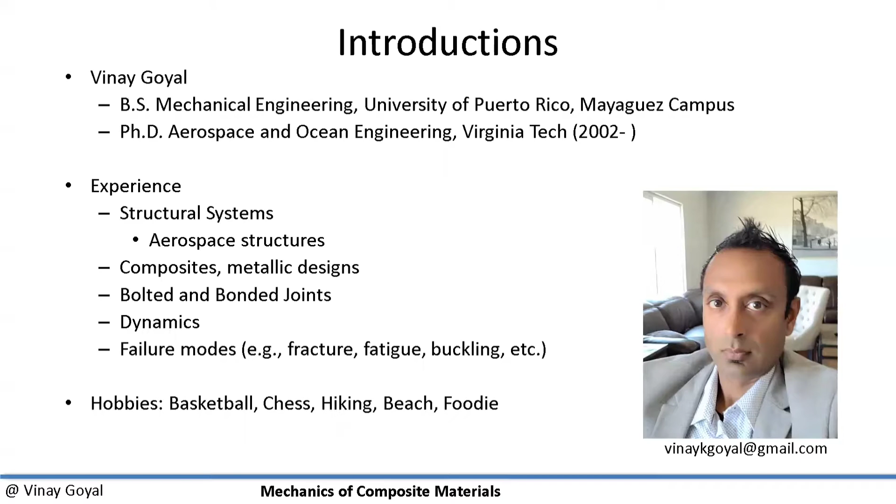In addition to that, I'm involved with several NASA activities, and I also work with the government on a lot of different projects. I have a vast familiarity with the use of composites in several arenas, including aircraft, launch vehicles, commercial applications, spacecraft, and other systems, even things such as a golf club, as an example.

What is the motivation? Advanced composite materials are extensively used in high performance applications. They can be used in automotive to decrease weight, in aircraft and ship systems, and including launch vehicles and spacecraft. The reason we use composite structures is because by decreasing the weight of the systems, we're then able to increase the efficiency and performance of these systems. So an aircraft can use less fuel if it uses composite materials, as an example.

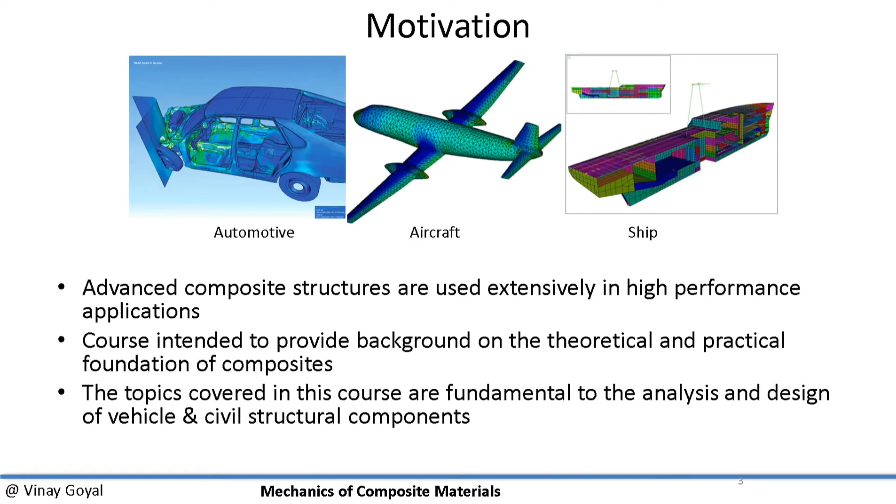This course is intended to provide a background on the theoretical and practical foundation of composites. The topics in this course are fundamental to the analysis, manufacturing, and design of vehicle and civil structural components.

What are the objectives of this course? In this semester, what I plan for us to do is to really gain an understanding of the fundamental concepts in the analysis and design of laminated composite materials. To do that, we want to understand the various methods for the manufacturing processes of composites. We're also going to cover experimental methods for the characterization of composite materials.

I think that's a very important arena that's usually not looked at carefully, but it impacts significantly the systems that we work on, because the experimental methods you use can drive the strength used in the analysis of a lot of the systems.

We'll cover design and analysis of composite materials, and how to tailor the composites to get the best performance. We'll then cover the failure criteria that exist to predict the failure of composite materials, and then talk about the design considerations that you need to keep in mind as you apply them in real systems.

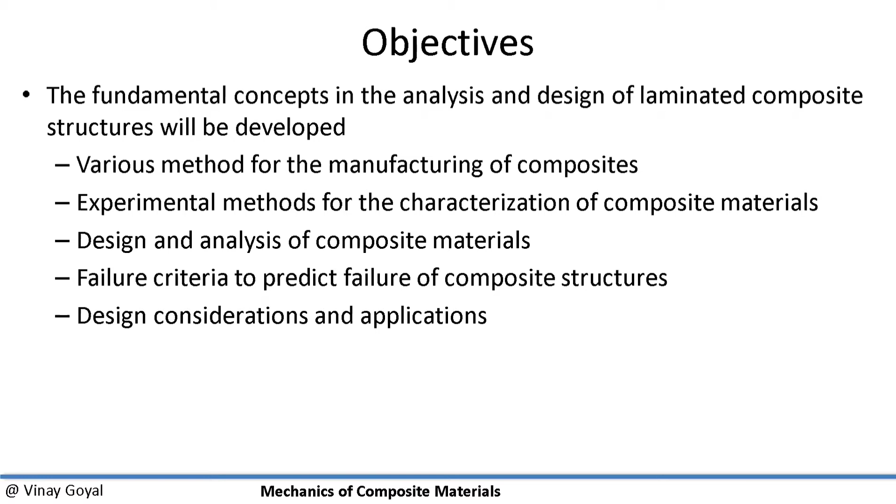I hope all these ideas come to fruition through this course outline as we go through it. What I'd like you to do is not only study the materials I'll be teaching, but also focus on materials outside of what I'll be teaching, because I think you'll learn a lot. One thing I want you to do is enroll in Composites magazines, and you'll see that in some of the work you'll be performing. The idea is to get exposed to a lot of different ideas and get informed about how composites have evolved, how these materials have evolved, and what are some of the new applications they're being used in.

So in today's lecture, we're covering the motivation. We'll be moving to material science, manufacturing, and micromechanics, and applications as well. Then from there, I'll give a very top level view of solid mechanics.

The idea of solid mechanics is covered much more extensively in a different course, so here what I'll do is provide a very top level view of that. And then we'll cover the characterization of material properties, which, like I said before, is extremely important for us to look at carefully — what kinds of testing I need to really get the material properties for the system of interest.

Then I'll be talking about approaches to determine equivalent material properties, and when we get there, you'll better understand what that means. But then later I'll move to the analysis of laminated composites, and that's really the mechanics of laminated composites. You'll be learning some of that material as well.

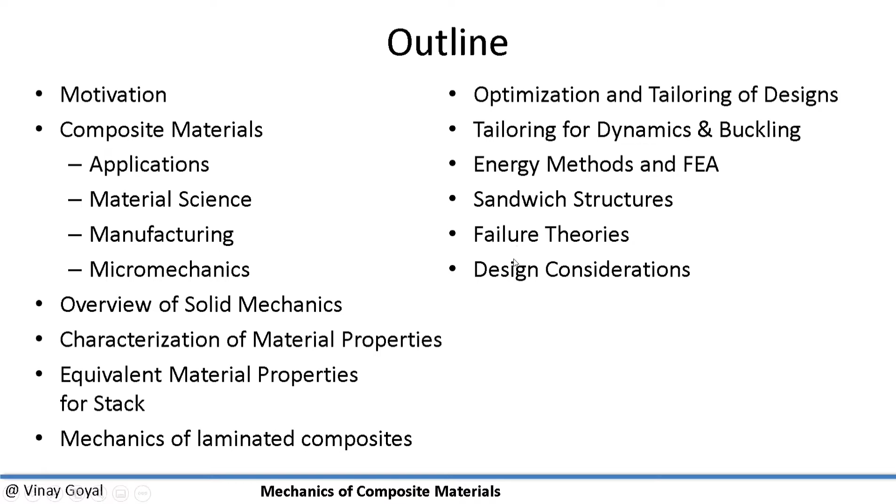Composite applications are used in an extensive number of applications, including a turbine blade that you see here, and they typically fail in fatigue in these applications.

Composites are also used extensively in aircraft design. The 787 body, made using a lot of composites, over 50%, in the main fuselage body, the metallic gray, with a combination of aluminum, which is the red, 20%, titanium, which is orange, to some fairly low percentage, and then steel at 10%, which is blue, and then other materials.

Composites have really increased the performance of a lot of systems, and this is very, very good, and that's why it's being used. But they also have a significant amount of downsides. They have upsides and downsides.

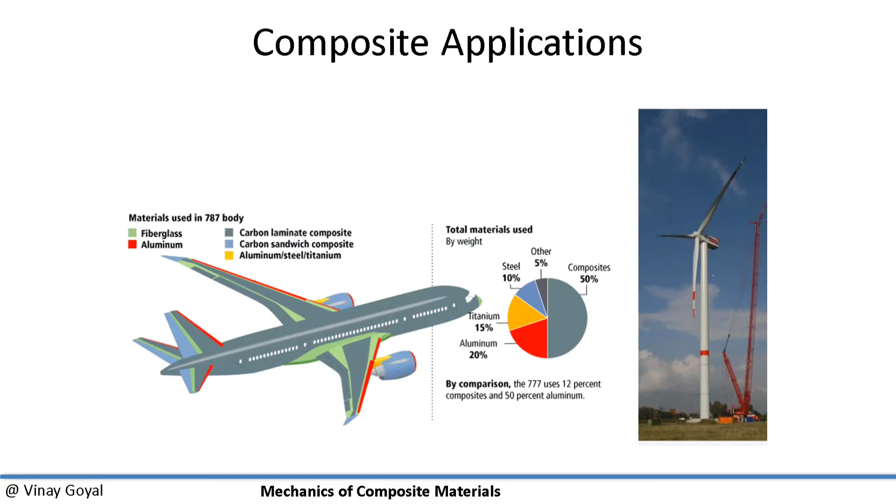By comparison, if I were to compare this aircraft to a 777, that used 12% composites and 50% aluminum. So the 787 is a much more advanced system, it's more robust, but also provides higher performance compared to heritage systems. So, what are composite materials?

Composite material is really the combination of two or more materials. The types of materials we'll be discussing here are a matrix. You're going to have a matrix material with a fiber impregnated within the matrix.

The matrix material tends to be such that it's malleable, so before you cure it, it's malleable, and that matrix material is soft at the beginning. It holds the fiber and binds the fiber together. That's the whole point of the matrix, is to keep everything together.

I'll look at it similar to, say, a shirt. You can see the fibers running through your shirt in perpendicular directions. But think of that shirt now bathed in a resin glue of some sort. That resin material, when it hardens, is now going to have the fibers impregnated in it, running perpendicular to each other. So when that glue hardens, you're going to have a composite material that's quite strong.

Because the material now has those fibers going through it. If you've heard of wood structures, the wood structure is basically a composite material, because you have these fibers going through the trunk of that tree, and that fiber is really providing the strength.

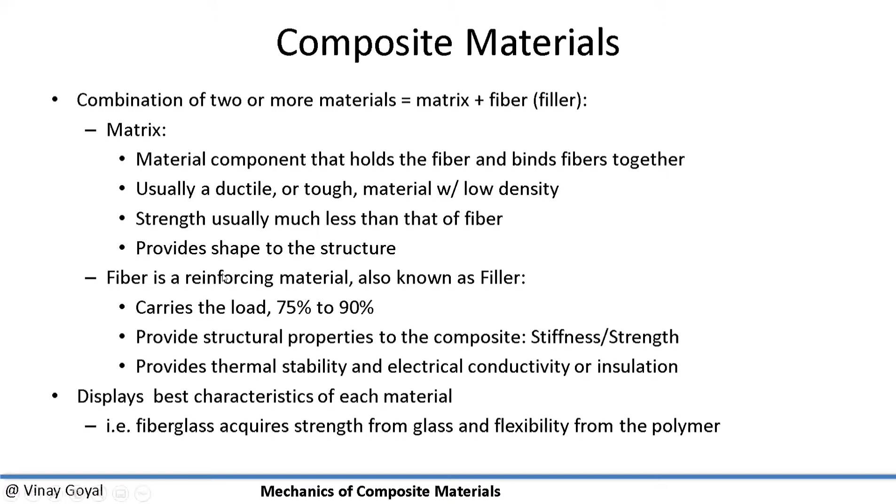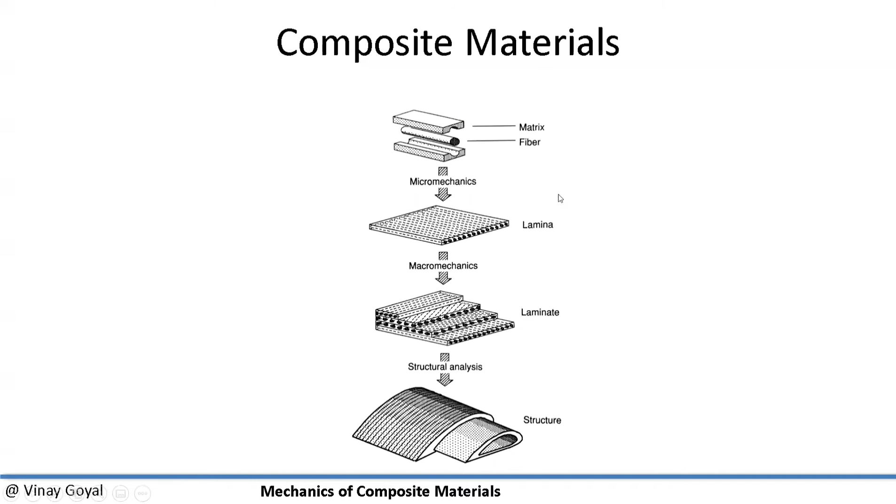Okay, so there are a lot of different types of composites. You can have a particulate composite. Concrete to me is a particulate composite, because if you put stones, rocks, and sand with a binding material, that's basically a particulate composite. But we're not going to cover this kind of composite.

You could have a situation where you have fibers running randomly within a block. We call that fiber reinforced composite. We're also not talking about this one. You could have flake composite where the fibers are chopped and maybe they have a very non-uniform fiber distribution across the composite. We're not covering that either.

Now, you can apply the ideas of this class to these types of composites very easily. But the kinds of composites we'll be covering in this course are laminated composites, which are going to look orderly. The fibers are continuous, and they're laminated. So I can stack the composites like this, and this is what is used for 99% of the applications. You could have these other ones, but the ideas I'm teaching in this course can still apply to these other ones. It's just that I'm going to specialize what we teach to this class of composites.

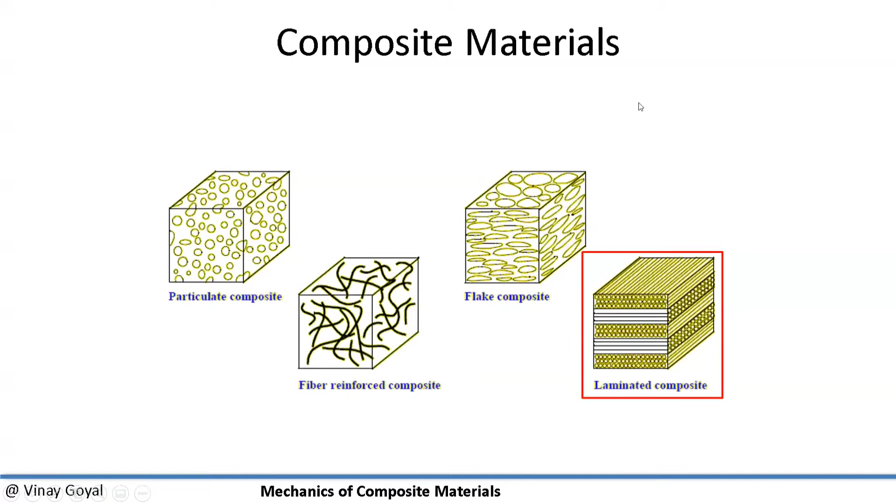Okay, so that's what we're talking about here. We're not saying we're not going to cover the other kinds of composites, but that we're emphasizing the idea of composite materials in light of laminated composites. That's what we're talking about. I'm going to go ahead and share a video of composites.

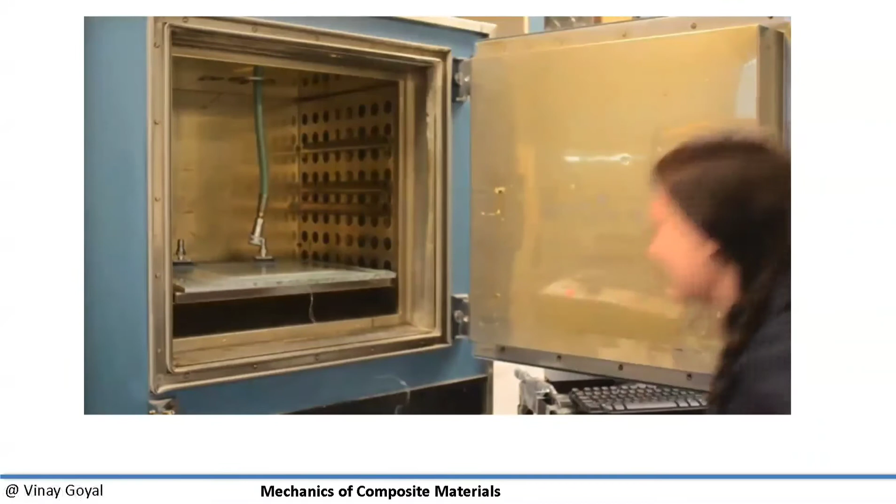So as you saw, we were looking at the manufacturing of a composite, and the manufacturing of a composite can be such that a lot of different defects could occur, including porosity, defects between plies, indentations from the pressure sensor, and many other things we'll cover later. The reason I was showing those videos is so you can get familiar with how the composite looks like. You're not able to touch it, but you can see the texture from afar, and you can see kind of a top-level view on how it's made.

So why we need to learn composites is because composites can be tailored to get the most out of a design. That's really the bottom line. Now, if you use composites and you use the standard set of angles, say 0 plus minus 45, 90, symmetric...

When I say 0 plus minus 45, 90 symmetric, what I mean is that the laminate's fibers are running along the 0-degree direction relative to some global direction you define. The lamina on top will be at a 45-degree orientation, and the minus 45 will be at the minus 45-degree orientation relative to the global coordinate system. Then finally I add a 90-degree ply on top, perpendicular to the very first 0-degree ply. The 90-degree orientation means the fibers are running along the 90-degree orientation relative to the global fixed direction we define.

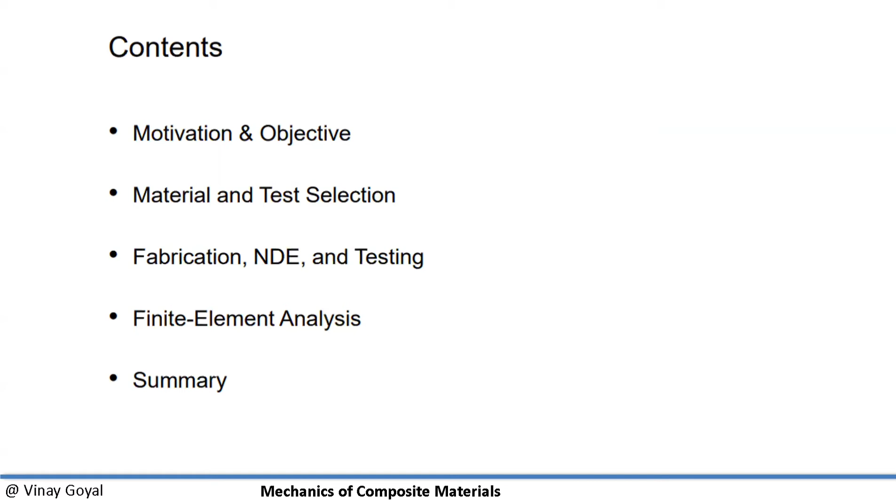In a lot of applications, you may use very strong composite laminates in areas where you need it, and you may use sandwich structures where you need that instead. But in a lot of applications, you may need to use both.

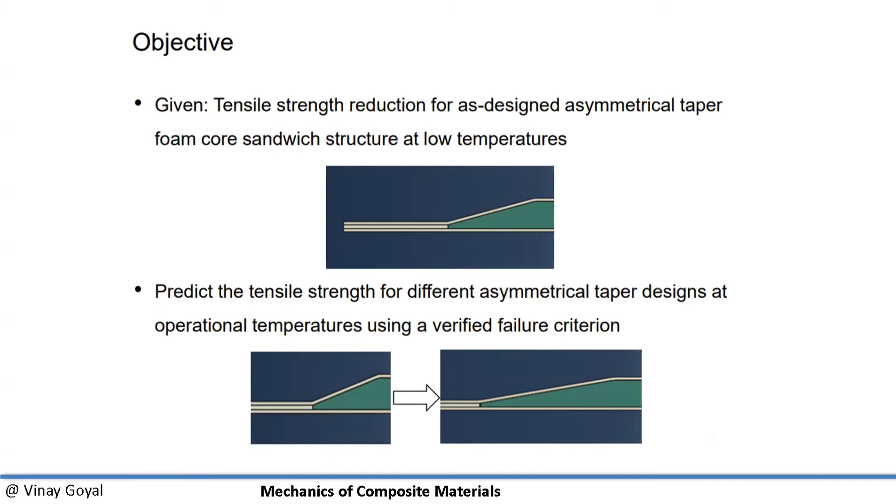The idea is to predict the tensile strength for different asymmetric taper designs at operational temperatures using a verified approach. The problem is that not every design is going to look the same. That's the bottom line. You may try to test some stuff in the labs, you may try to analyze it, but that is only good for that design. So the idea is to develop an analysis tool.

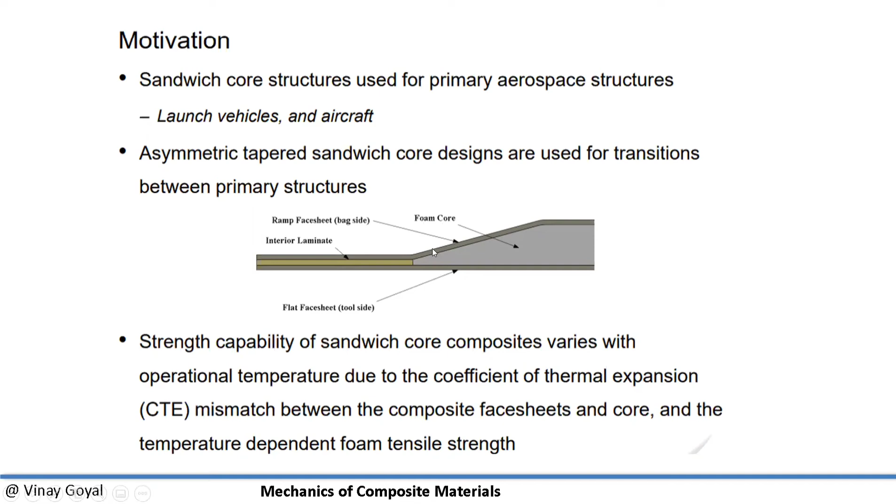Anytime I talk about analysis, I say analysis is not sufficient, but it also helps you gain confidence. Say your analysis matches the testing very well, then you can use analysis as a transfer function and look at other designs, as long as the failure modes are consistent.

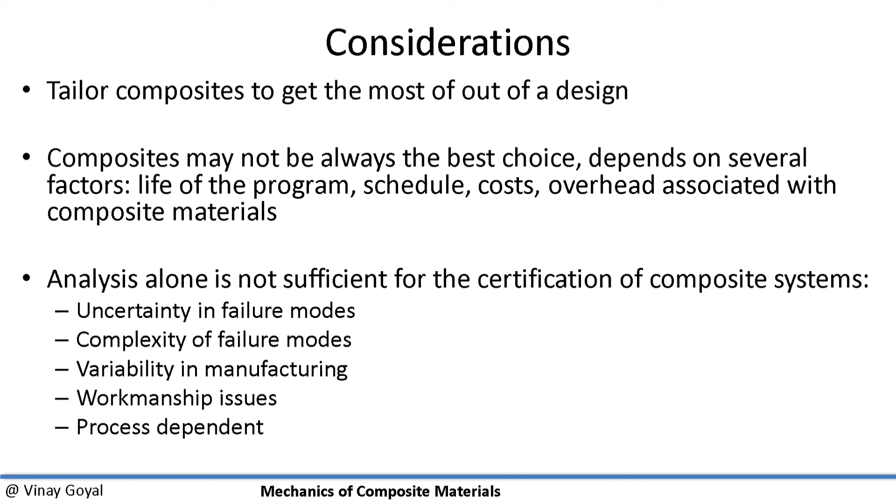If I'm able to come up with an analysis approach that's able to verify this design, perhaps I can use that analysis to look at other designs. So that'll be very valuable, right? That'll be a good objective.

Here I'm providing the kinds of materials this was made of, so you're aware of it. You have a film adhesive, AF191. A film adhesive, for example, will be a very thin layer that glues everything together. IM7 is a type of fiber, while 8552 is the type of epoxy, so that's a laminated composite. The fiber and the resin together are this formulation here, and these two together make up the lamina.

Of course, we have multiple ply angles, so that needs to be considered as well. 200WF happens to be the Rohacell foam core used in this application, so that's the foam shown here in green. In-house material level testing needs to be completed to understand the full strength capability of the Rohacell foam.

Of the composites and the film adhesive, you want to get a good understanding of all these components. Now you can see the difference between composites and metal. If I had a metal, I wouldn't have to do any of this, I wouldn't use any of these materials, I'd just characterize the aluminum. That's all I'd do. In this case, I have to really look at everything, including how these materials interact with each other. You have to.

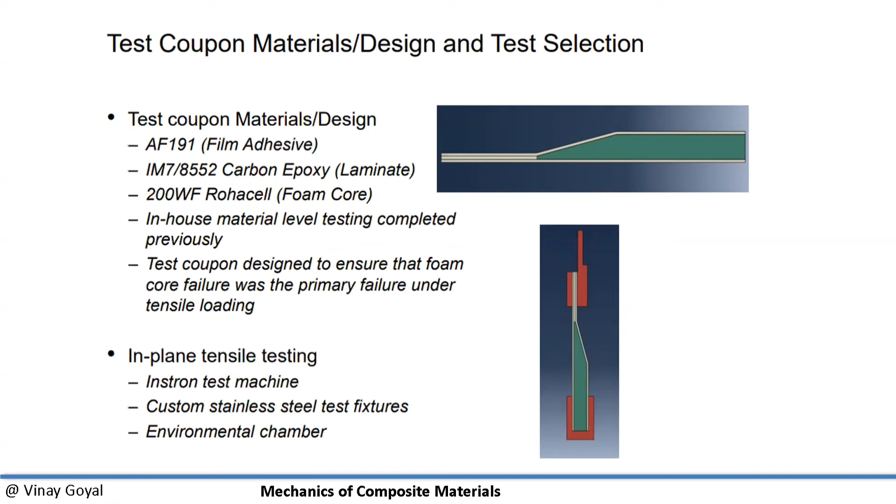We also need to load this up because in actual application, this is loaded, including the exposure to cold temperatures, so you want to make sure you have both. This in-plane testing machine included the Instron machine to apply the loading condition, and then you have an environmental chamber, where you put the composite, condition it to the humidity and temperature you want, then test it. That's the goal there.

You can see here the specimen fabrication. The foam blanks were cut using a CNC machine, and then the plies were hand laid up, just like we saw in the videos. You put the layers on top of each other, and then you bring it to a mega, very big autoclave to cure the material, so that the resin that was soft becomes hard.

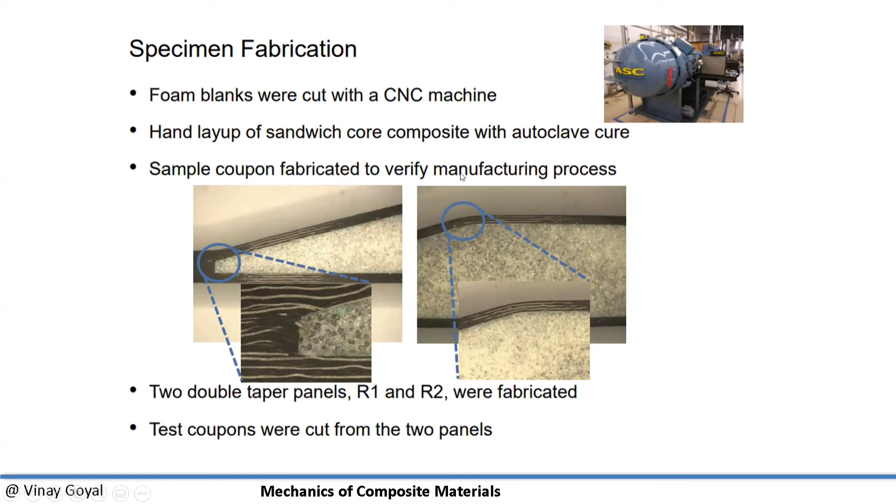The sample coupon fabrication is also done to verify the manufacturing process. You want to check that out. You can see here the zoomed in version of this, but it looks quite smooth and quite good. It's a good fabrication process there.

Then you want to perform a non-destructive evaluation, I'll touch on that later. X-ray, ultrasound - the idea there is when you send a sound signal through it, if there's a delamination somewhere in between where two plies are separated, then the sound will bounce off from the free surface and shoot back up. That's how you know there's an issue between plies. That's one approach. The second approach is to perform X-ray, and that'll produce an image, but it's not always going to be perceptive to delaminations like I talked about.

Here you see colors, and the colors are just representative of what's going on with the bond line, what's going on with the composite ramp design. Because this is a ramp here, it goes up, becomes thick, and then ramps again here. I'm not covering the exactness of what this defect is, but bottom line is it was going to be cut here anyway. So that doesn't play a big role.

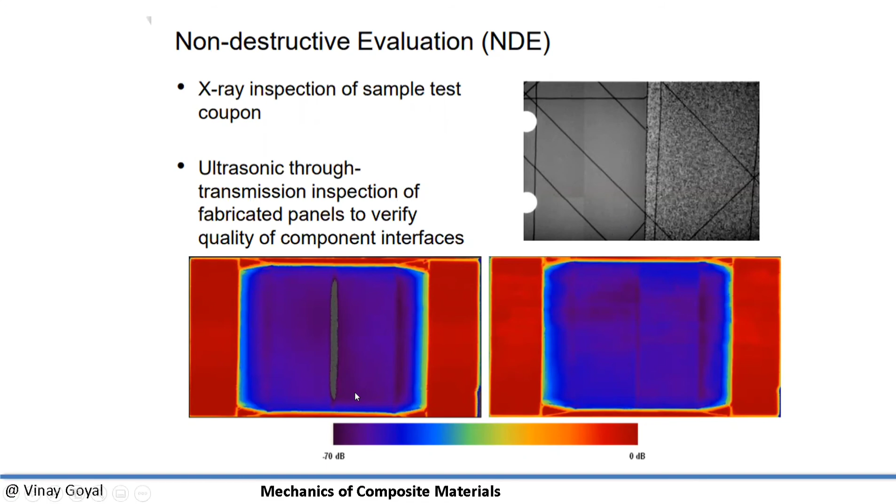For the design of the test, you can see here the foam core in white, and the black is a composite that's laminated. You can see here very thick laminated composite, and this transition helps you go from laminated composites to a design where you have a sandwich structure. It's very beneficial, like I said before - you're using the materials where you need them the most, and other materials where you may need them less.

You can see here, there are fixtures here and here and here and here. Those test fixtures provide boundary conditions that are basically clamped, so they're good for what we're doing.

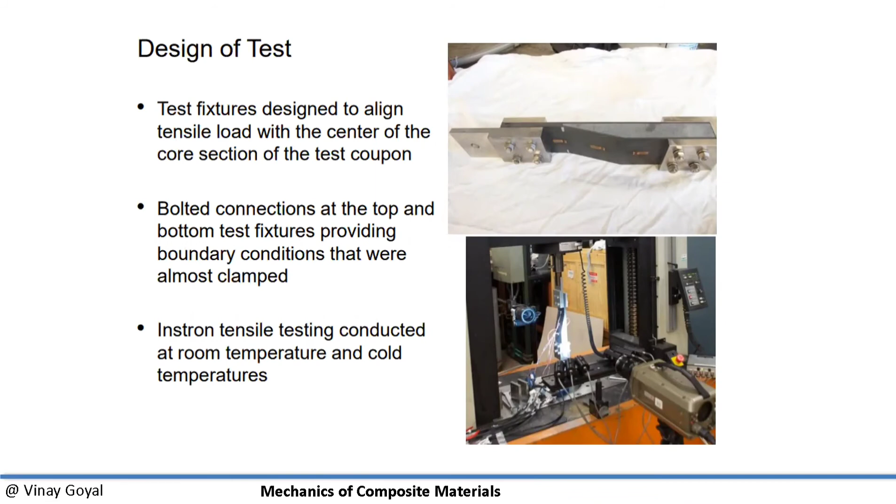The tensile test program encompassed 70 degrees, minus 26 degrees, and minus 58 degrees, within the flight experience. That was the whole point of doing this test battery. Three coupons were tested per configuration, and usually you want to also involve the idea of moisture that should be looked at, so I encourage you to look at that as well. You also have tensile testing at room temperature performed in open air, and then tensile testing at cold temperature performed with a controlled environmental chamber.

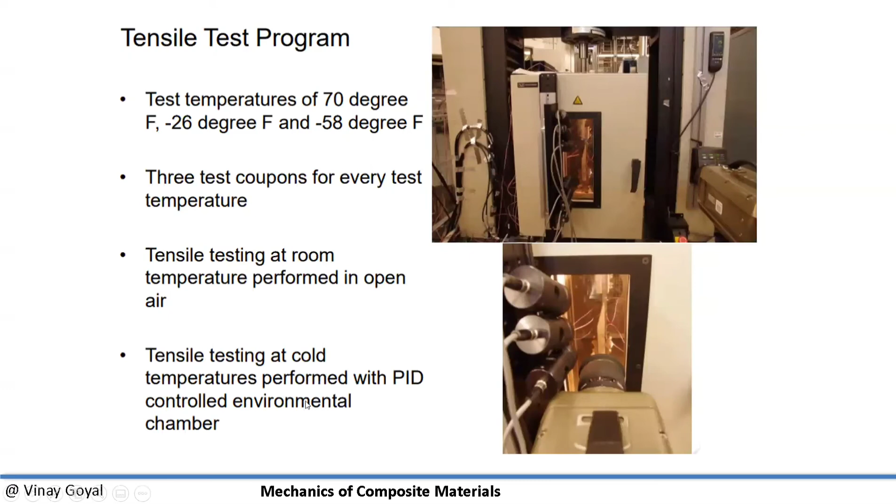At cold temperatures, the strength, the loading applied to this coupon is really low compared to the room temperature one. So something was going on really that needed to be understood, because in the actual application, the failure load is actually way smaller than if you were tested at room temperature, which is not intuitive. You'd expect that the test configuration somehow will be the critical condition, and it is in this case, but it doesn't encompass all the other conditions, room temperature and so forth.

As a consequence, it's important to instrument the samples really well, so when failure occurs, you can pick it up and then assess it.

Here you can see a high-speed video. I think it's important to invest on that. The high-speed video from the room temperature test is provided. Here you can see how the cracks kind of initiate there. I'll let you look at it for a couple of seconds.

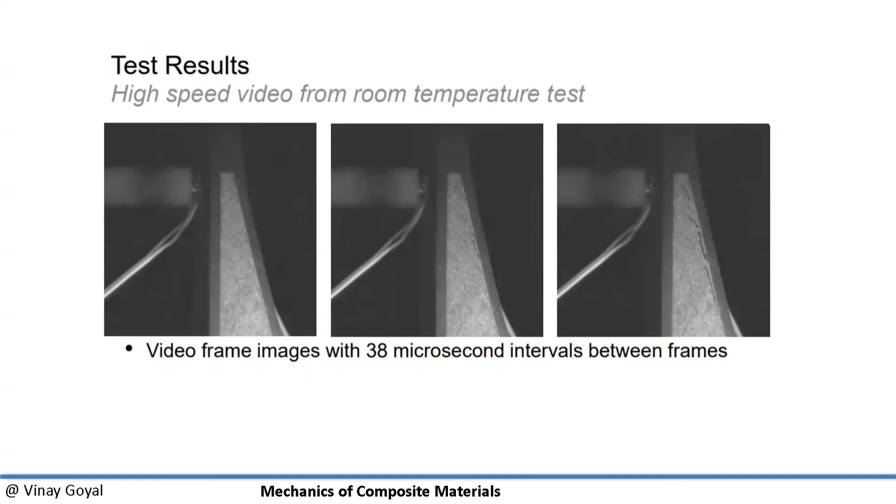Geometric nonlinearity is important to include, and fixed boundary conditions at the base were applied, representing the movement of the setup. Basically, you want to leverage all the information from the test to build these models.

Finite element analysis can then be performed: step one, step two, step three. So the first step is to bring the sandwich composite core to the stress-free temperature, because initially when you bake a composite, the composite is going to be relatively soft. The resin has not hardened.

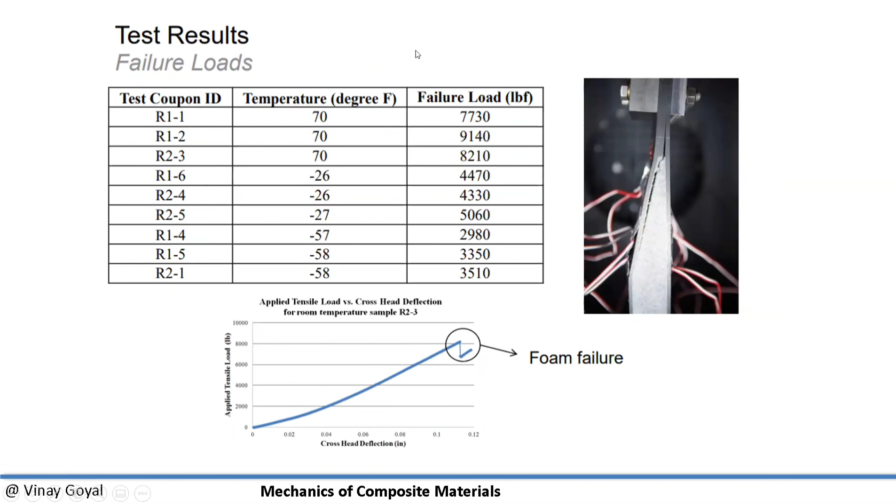So that's really your stress-free temperature. When you put it in the oven and heat it up to 300 degrees F, say, then the resin hardens, and so that's going to have some built-in amount of composite residual stress. The one thing I want to mention is that this residual stress can be hard to characterize sometimes. In this case, it had to be done because failures were happening at low levels of loads, way lower by half compared to stuff at room temperature. That was unclear what was going on, but when you look more carefully, you can learn about what's going on through this process.

The first thing I want to mention is that there is a stress that's developed from cure to a later point in time.

Then step two, you apply the thermal environments from the cold temperature, the room temperature 70 degrees, to the steady state tensile test temperature. So if this composite sandwich structure is going to be at room temperature and it's going to really see minus 30, you want to bring it up to minus 30 as soon as possible. We address that in our standards as well, but I think it's important to highlight.

You can apply a tensile load until the foam tensile failure occurs. So, three things loaded: first, cure stresses due to temperature contraction or expansion, because you can have both, but in our case it's going to be contraction. Then you have environmental thermal stresses, and then the loading configuration that came from flight.

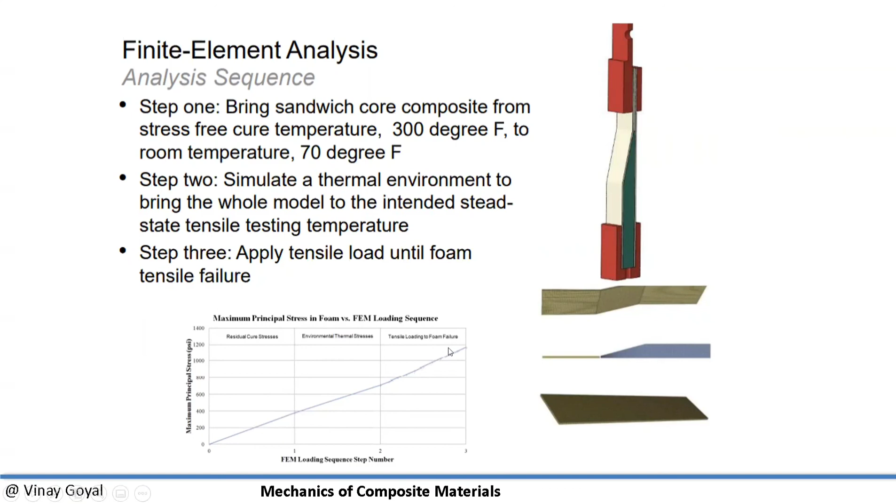If you look at the finite element analysis of this, it's actually quite eerie because we plotted the max principal stress within the foam. You can see the values are relatively small, 1,400. But that's important to note because very often we think the only failure mode that could occur is composites, but the foam could also fail. So there's this temptation of not doing anything about it on the foam side, but you have to really pay attention to it because in this case it's a critical failure mode.

There's a lot of dispersion because the failure mode at room temperature was quite different from the one at cold temperatures. At cold temperature it was foam failure, but when you go to higher temperatures, the failure was an interlaminar failure, a delamination failure between plies. So you want to really look at the whole spectrum.

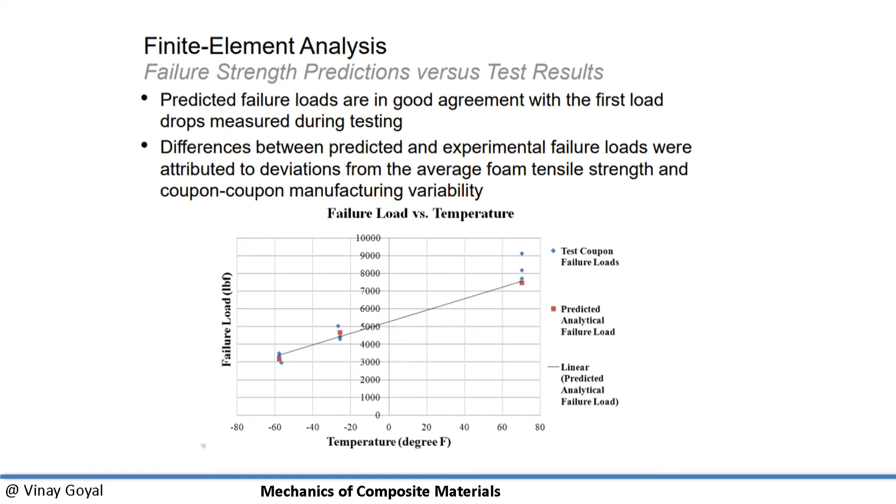But once the physics of the problem were well understood, it was much easier to start predicting what could happen here. Again, you can see how this max principal stress is aligned with and is perpendicular to these cracks that develop within the foam, which tells you that the max principal stress is a good predictor of failure.

The conclusion is that when you use complicated systems, like the composite ramp I showed, you have to really consider full test, non-destructive evaluation, and analysis methods to investigate why failure occurred and how you can increase its strength if possible.

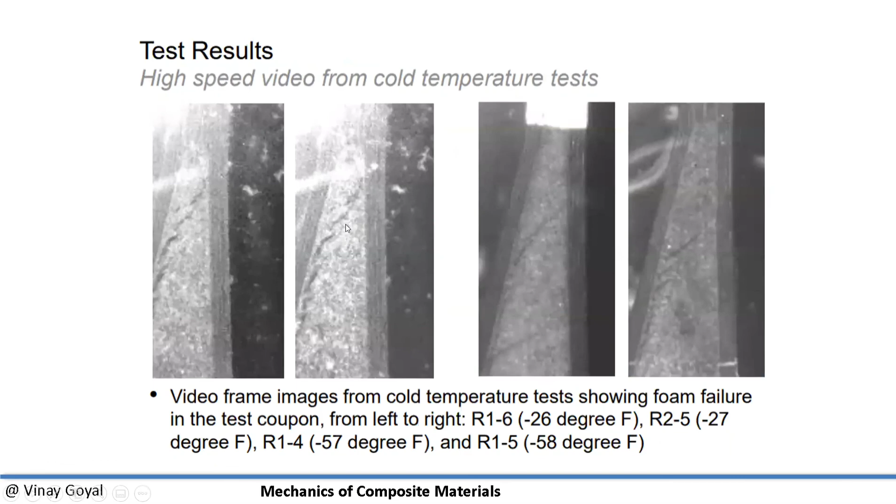We also showed how by looking at the different failure modes, in this case, we found through a lot of research that foam failure was happening. You can see how high-speed video can help you narrow down the failure mode to one, and then examine that one in your final model and gain more confidence in the modeling techniques. So it's important to gain that analysis and testing correlation, because then you can use analysis for other things.

Tensile failure loads were decreased due to the applied cold temperature, and that's driven by the coefficient of thermal expansion. The composite does not expand as much as aluminum, for example. So you have to consider that extra loading condition.

What was very helpful was to divide the loading conditions as a function of time: during manufacturing, we look at that; during temperature conditioning, we look at that; and when load is applied, we look at that. By adding all these things together, we can get a grander picture of what could be happening with this composite ramp in this example.